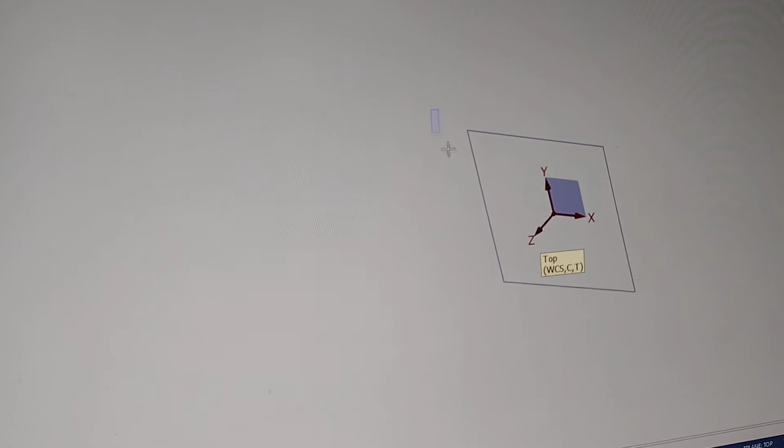It says select. Now if you hold the shift key down and click on one of the lines, it'll do everything that's connected.

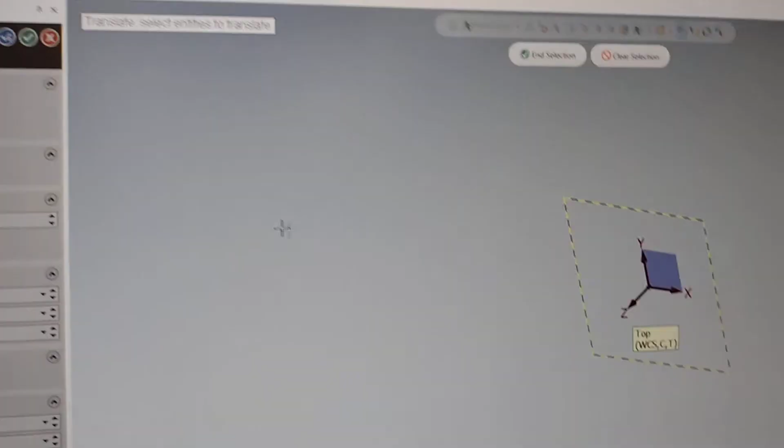So, transform, translate. And then when you select your lines for your box, it should show up as a kind of hidden line, dashes, yellow and blue. You have that?

Good. Over here. Yeah, I got it like that.

Okay, so the easiest thing at this point is, the first section here, we have copy, move, and join. What we're going to do is add some three-dimensional depth to it. So we want to join.

The easiest thing down here is go to where it says delta, which is change. I'm going to highlight the Z and go minus 1.5. My join doesn't work.

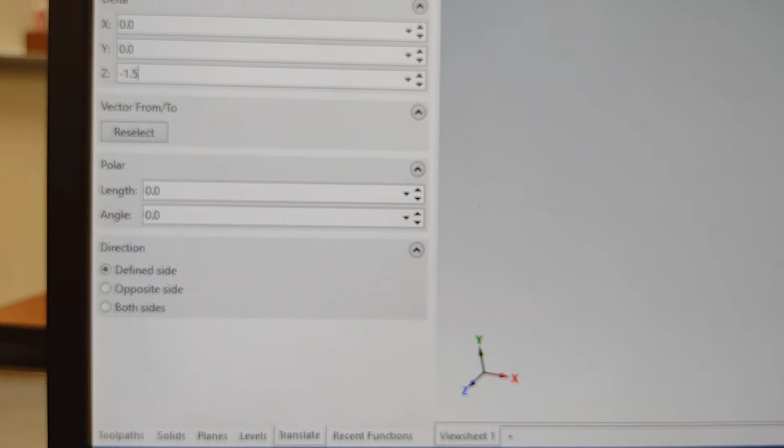Okay, let me make the rounds here. So let's, okay.

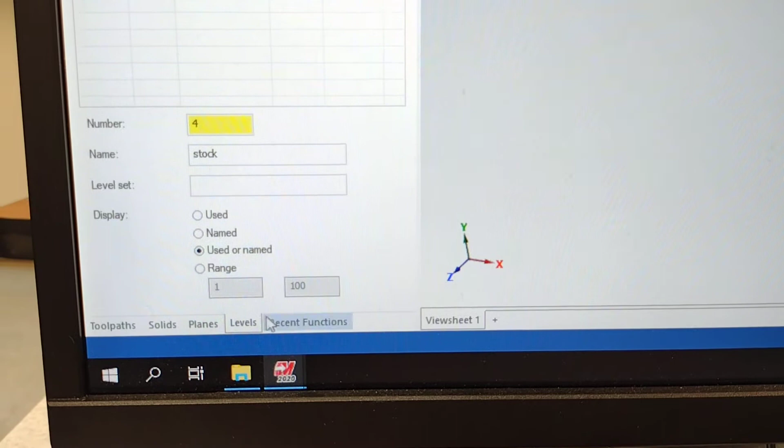Now we should have a box with the little coordinates on top. That's going to be our stock. I'll go over to my levels, and I'm going to highlight the 4 and change it to a 1.

And then I like to maybe call this a wireframe, because now we're going to draw the part.

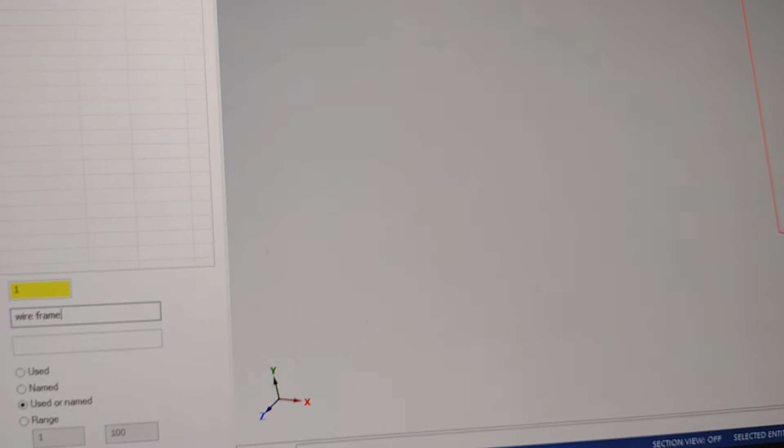And we can either leave the box here, or we can turn it off by clicking the X on the number 4 row up here on the left. You can turn it on or turn it off. I might turn it off. I don't need it.

So we're kind of back to square one here. We're going to peek over at our drawing, and the finished dimension is 2.75 square.

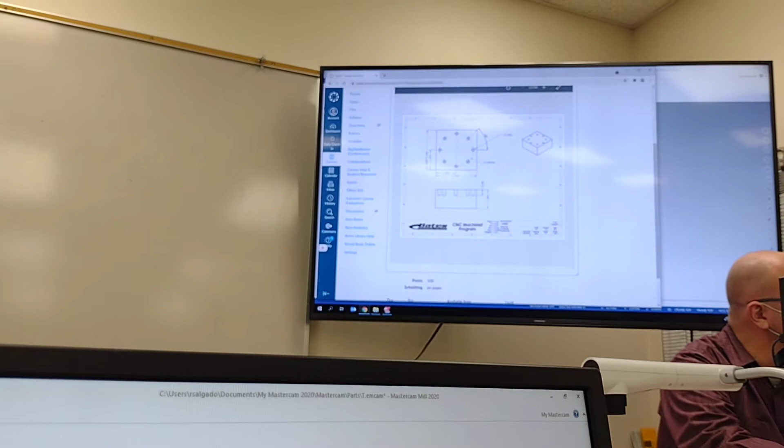So we're going to go to wireframe, rectangle, 2.75, 2.75. I'm going to uncheck and then recheck the anchor to center button so that it's active.

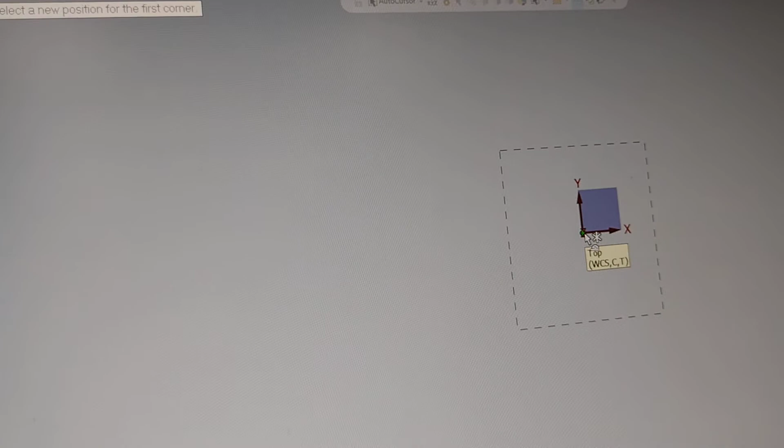I'm going to drop it right in the middle there. I'm going to click the green checkbox.

So don't click the green checkbox before you center it. Green checkbox is the last thing, when it's all in the right spot. Okay, you're happy with it. When you're happy and you know it, then clap your hands.

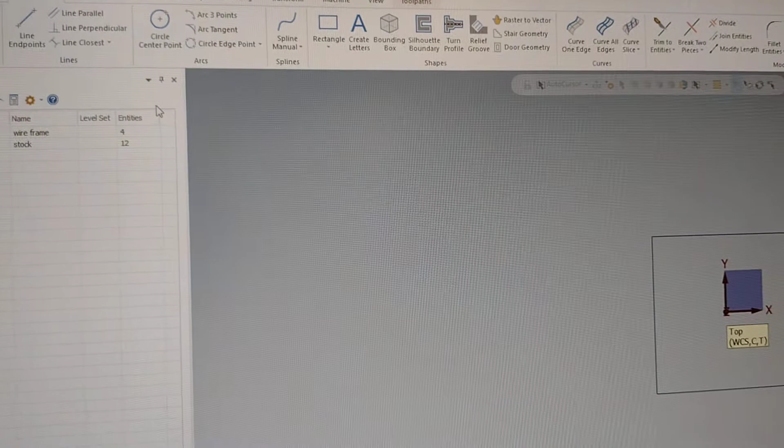All right, we gotta give it some depth. Sometimes I like to hold the mouse wheel down and roll it up just a little bit so I can kind of see things happening when I'm working with it. If I peek over here at my print again, I see it's 1 1/4 tall.

So we're going to give this some depth by what? What do we want to do? Transform. Yep, transform, translate. Very good. And you can select these individually or hold the shift key down, click on just one of them, and they all get selected.

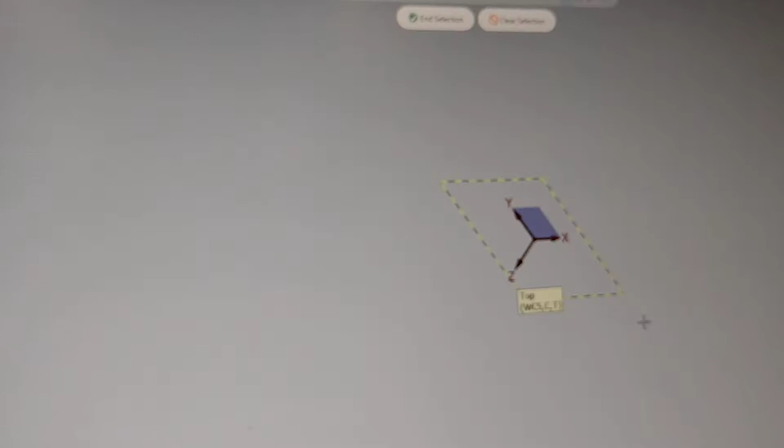End selection. Make sure this first column up, make sure this very at the top of the column here, make sure that says join.

When that says join, when we go straight down, that draws lines between the original and the new copy of it. In this case, since we're going straight down, what it does is put the vertical lines in on our cube. And what would copy do?

Just copy, it'll erase it from where it's at and make a new one where it's going to be. Oh, okay. So copy would be like a whole new part.

Yeah, it just, copy is taking the coffee cup off the table and putting it down on another spot.

Okay. I'm sorry, I said that a little bit wrong. Copy takes this original image, and puts a new version of it next to it, in a new spot.

The cut, or the move, takes it away and puts it in a new spot. So move is sort of like cut and paste.

So I got the highlighted Z here, I'm going to go minus 1.25. When I hit the enter button, I'll see my new square has been moved down, and the joining makes those verticals. And I like it, so I'll click on the OK button.

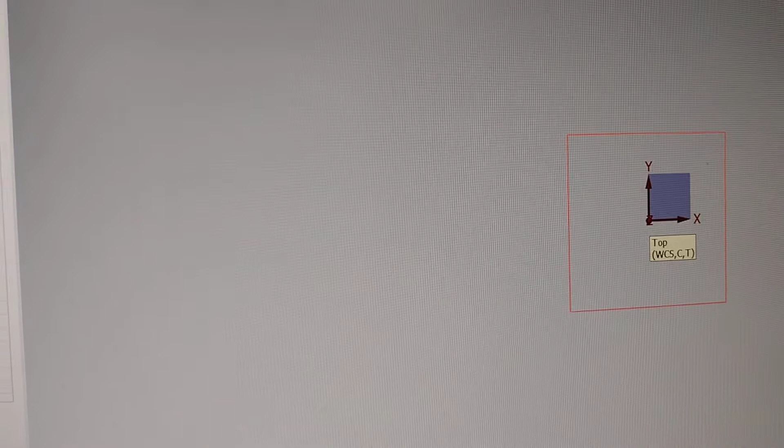What's the shortcut key to make this like that? Alt 1. There. Yeah, you guys remember. How do you turn the picture around? Like this. What's Alt F1? Fit the screen. Oh, okay. It zooms in or something, and F2 zooms out. Fit the screen, orient.

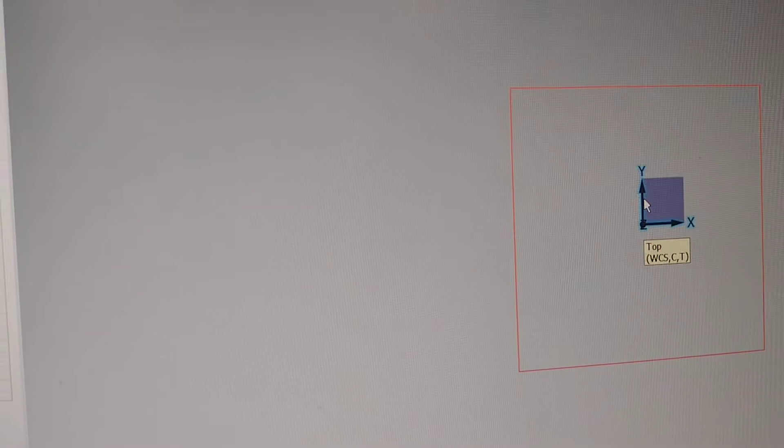The wheel, the middle, Ken, the wheel. Right. Push down on it and then move the mouse. Is that working? Is it doing like mine? Yes. And then if you want to reorient it, Alt 1. You want to make it as big as possible.

Okay, so there's our part. Let's go. I'm gonna go take a reference check on our print. And let's put some circles in it, some holes. These are 0.203 in diameter. Now we could put them all on the same level that says wire frame. I tend to like putting different features on different levels so I can isolate them when I'm clicking on toolpaths.

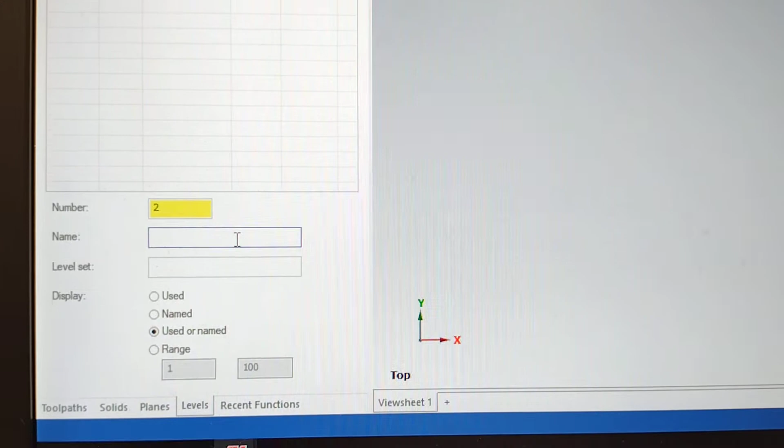So I might come down here and say number 2 and put in a description. Bolt circle. And notice number 2 is active, so anything we draw is going to be on the number 2 level. Well, I want to draw a circle. Where would I find the circle? Wireframe. Yeah, wireframe. And I'm going to click on circle.

And I'm going to come down here now. It says select a center point. So we could select the center point. Notice we could click on other features. See how I can click on that midpoint or the corner. But I'm going to come over here and highlight the top of this box. Where is it? Diameter. I'm going to highlight diameter and type in 0.203 and enter.

And then green checkbox. And you should have a little circle right in the middle. Yeah, circle? Yes. You can look?

Can I ask a question? Yeah. On the numbers right there on that column, it goes 1, 2, and 4. Why did we use 4 for that one? Why did we use 4? Yeah. It's just a holdover from when I was in the shop writing programs. We'd have a basic Mastercam file. When you got ready to program a part, it already had all the levels laid out and labeled, and it had some certain parameters already set.

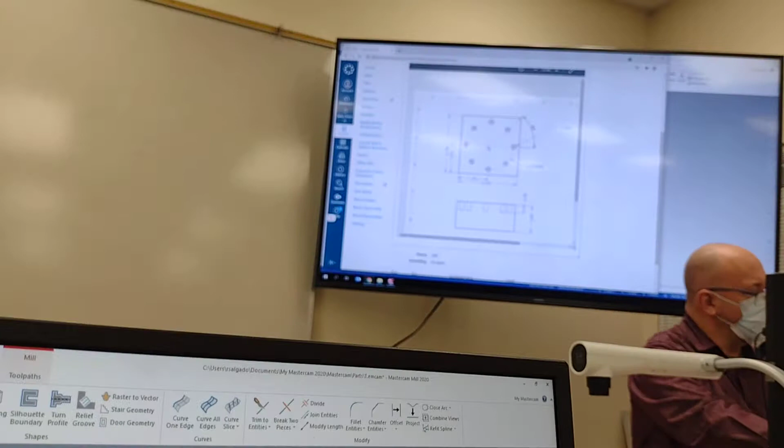Either way, we look back at our drawing, and keep in mind there's different ways of creating a bolt circle. This is just one way I chose. It's in the center. We're going to move it to the outside of the bolt circle, which would be half of the bolt circle. Mastercam can do math for us.

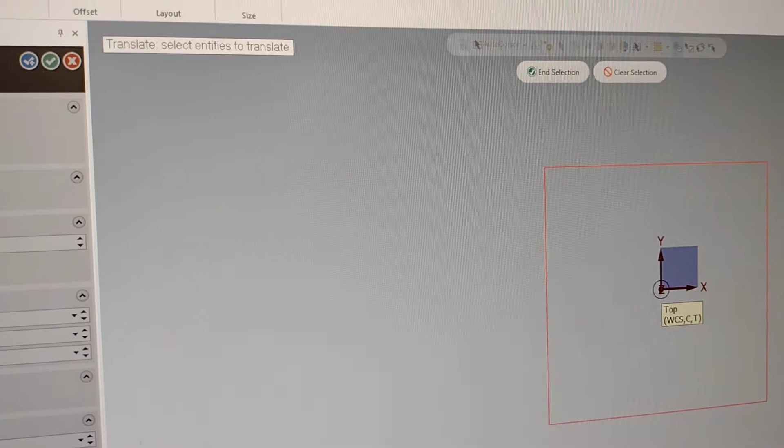So the bolt circle is 2 1/4. So let's start with this. We're going to go to transform, translate. What's it say up here? Select entities to translate. So I'm going to either window or click on the circle so it shows up a little blue and yellow. See that? And that's all I want to translate, so I click on End Selection.

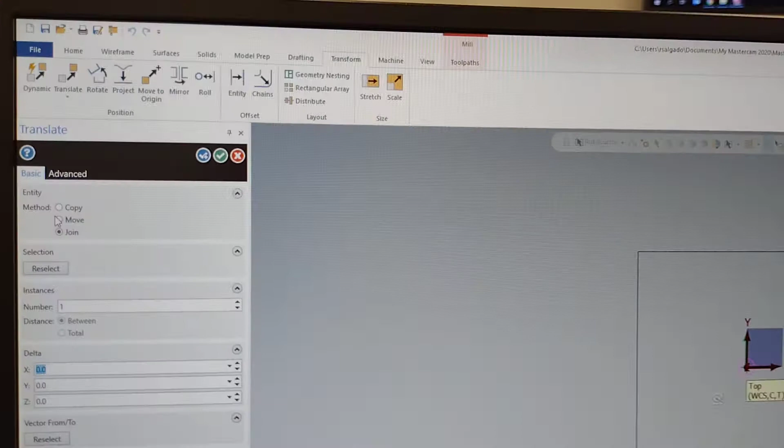And we're going to move it. This top portion of the column here, I'm going to move it in X. What was the diameter of my bolt circle? 2.25. 0.203? 2.25 is the bolt circle diameter. Oh, okay. /2. Yeah, so just like Ray said, we're going to type that in. Now /, which is right above the number 8 on the number pad, is your divide sign. And we're going to divide by 2. When I hit the enter button, you should see that little circle fly out to the right.

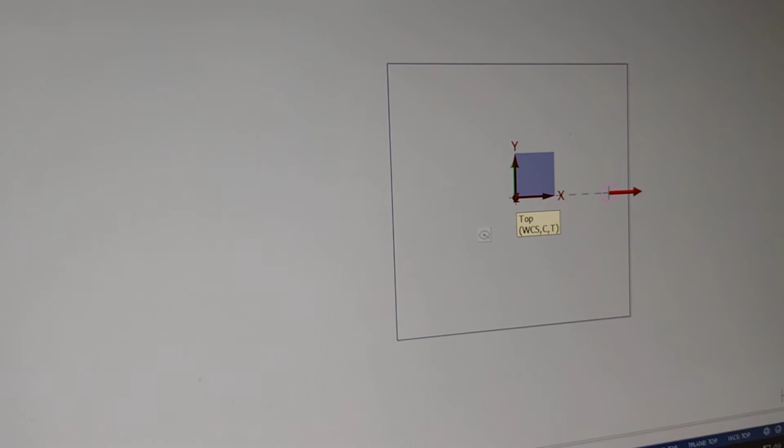So put 2.25 and then the divide sign, yep, and then 2. Divide it by 2, and then hit enter? Yep. Now, you can just enter the radius amount to move it over straight. But I do that to show you that Mastercam can do some math for you. Just to show that there's other ways. Then we're going to click on the green checkbox. So everybody got a starter hole at 3 o'clock?

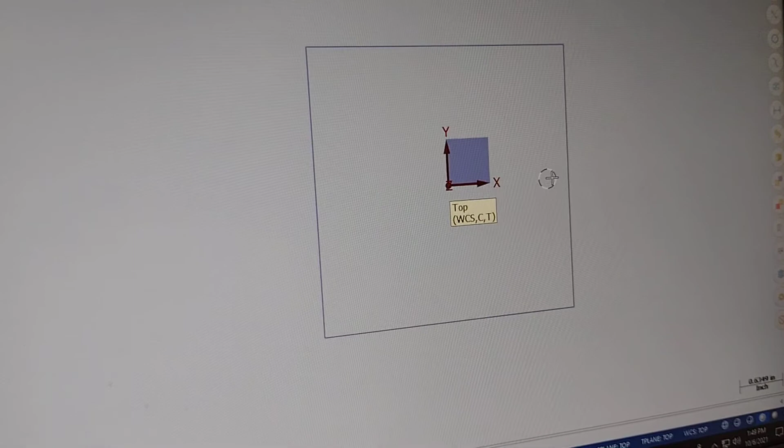Yes, sir. So we're going to keep this transform window open and go over to rotate. We're going to rotate this little circle about the center of this part. So we're going to select the circle, click on End Selection. Now over here, because I want to replicate it, I'm going to click on Copy. Now if we look at our print, that's 45 degrees between circles. So this angle right here, I'm gonna make that 45. And if I hit the enter button, you'll see it click over 1.

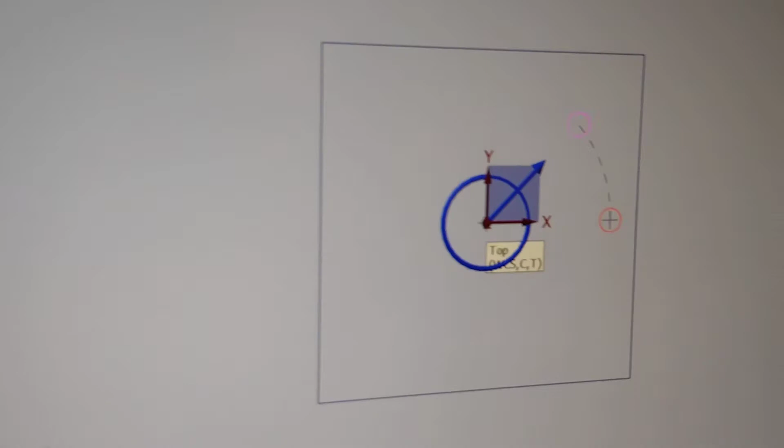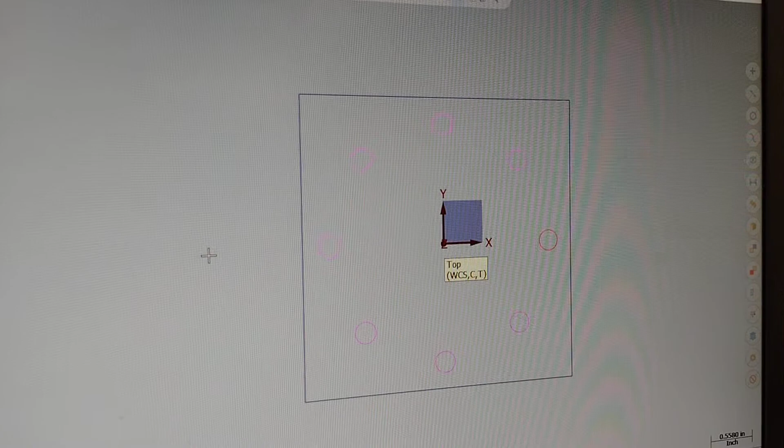If I highlight that, right above the angle it says number, and it's instances. What that means is how many times does it happen? 7, yep. And then hit the enter button again, and you should see a pattern of 8 circles, with the red one being the original one at 3 o'clock. Oh, I have 4 now. Got too many of them? No, I don't know what's this. We'll move forward a little bit. At this point, I want to add some depth to the circles. So on yours, Ken, you're just going to add the depth to the one circle for now. I'll come back and help you get some more circles.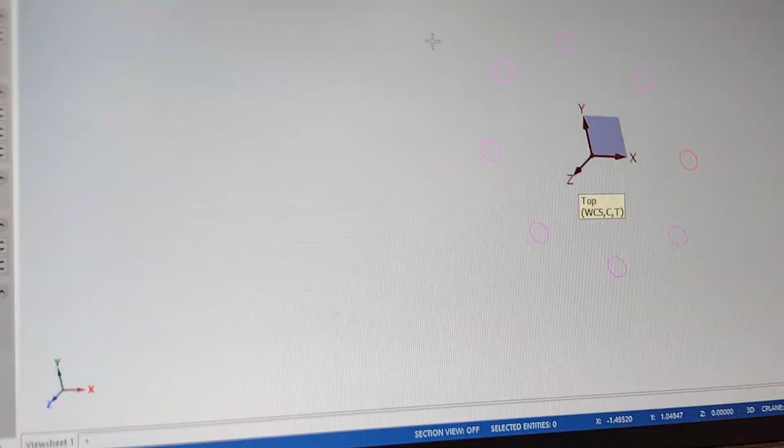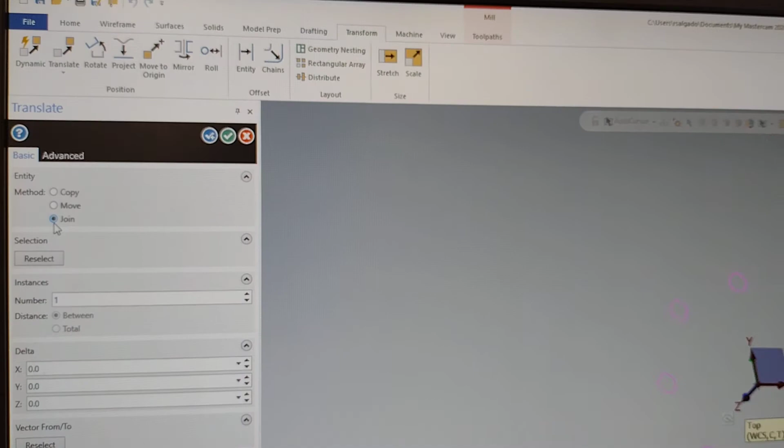Let's turn off the square so it'll be out of our way. And we're going to go back to transform and translate. And when it says to select entities, I'm going to make a window around all of those circles. And end selection. And over here in this top bar on the column, I'm going to make sure it says join. I don't remember what it was, so I got to look at the print again real quick. 0.380 deep. So down at the delta, we're going to go minus 0.38 on Z. And then we should click on the green checkbox.

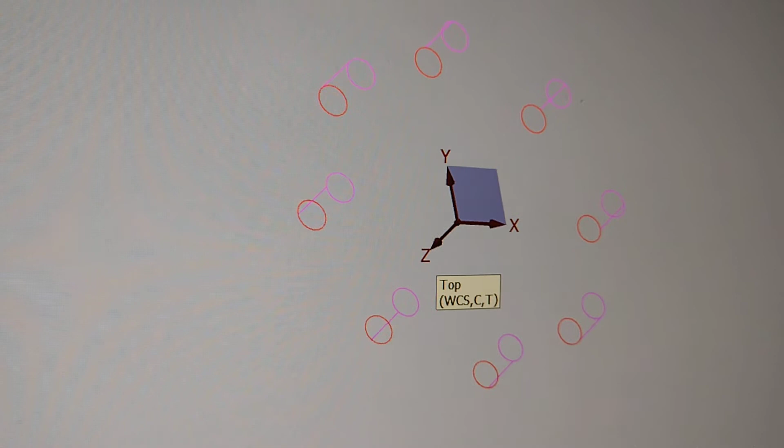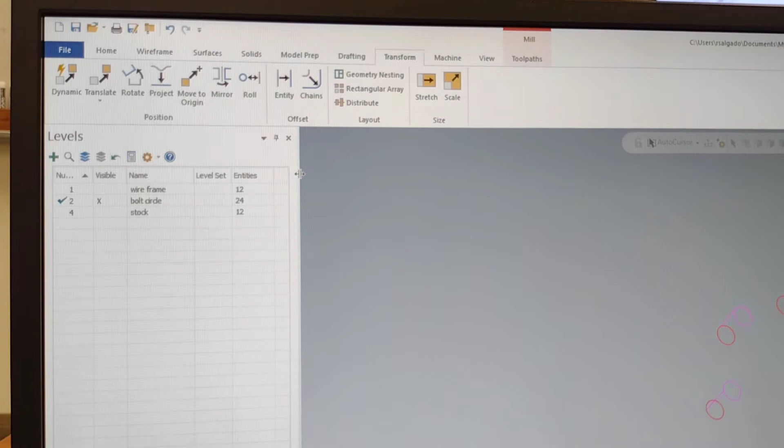And hopefully you have a pattern of red circles over a pattern of purple circles connected with a vertical line. Do you have one? Yes, I have that. Only line, I don't have a C. You just have one though, right? Right. Okay, so that'll work for the next operation. You get the pattern? Yeah. Okay, doing good, Ray? So I got a question. Yes. Like for his.

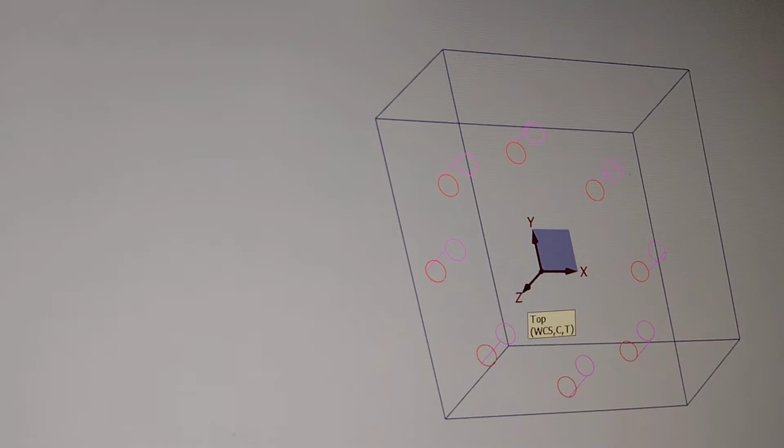Okay, so now I'm gonna activate my wireframe, and let's see. You know what? I'm gonna switch a little bit. I'm gonna turn on the stock only. Okay, so you should have just a plain box. And then down at the bottom here, at the far left, it says toolpath. I'm going to click on the toolpath.

Mine is acting brand new. It's not letting me just uncheck the bolt circle, but we can proceed. So we'll go back to planes, levels. Yeah, make sure the check mark's on the level with the stock, and then you can